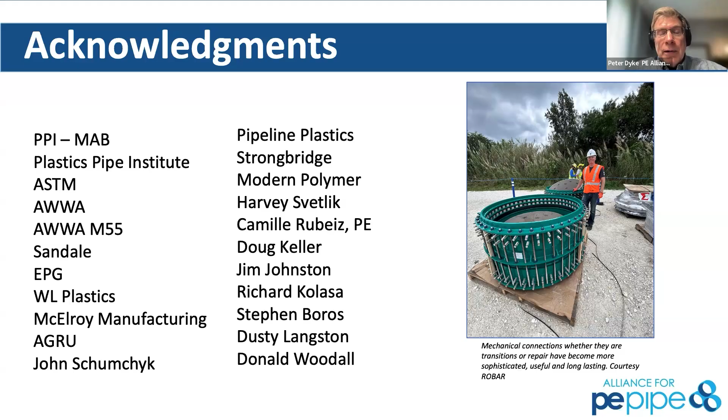Good afternoon, everybody, or morning, wherever you are. My name is Richard Kolasa. I'm with WL Plastics. I'm the technical service manager there and do a lot of the engineering work between sales and engineering to make sure that municipalities or whoever the engineering firms understand the product properly and hopefully take down any barriers for understanding. So I'm really happy to be here today and look forward to the presentation.

Well, that's a great photograph of you, Richard. It looks a lot better on the photographs than you do in person. So I'm thankful for that.

Stephen Boros, welcome to the Alliance's webinar program this week. Hey, good afternoon, Peter. Thanks. No, glad to be here for another PE Alliance. Fantastic educational webinar. Always happy to participate in these things. And I learn a lot as we go through this as well. So looking forward to it this afternoon.

You know, Stephen, if you didn't get a chance, we did a webinar a couple weeks ago on data centers. And we got to learn a lot about PPRCT and polyethylene. We got a bunch of projects that people wanted help with as a result, and I'm thankful for that. I'm so excited about those data center opportunities. Oh yeah, that's a really hot area right now. Can't get enough piping to go into those projects. So keep making the pipe, Stephen and Richard. Well guys, we're going to bring you back in a minute. You're our primary experts today.

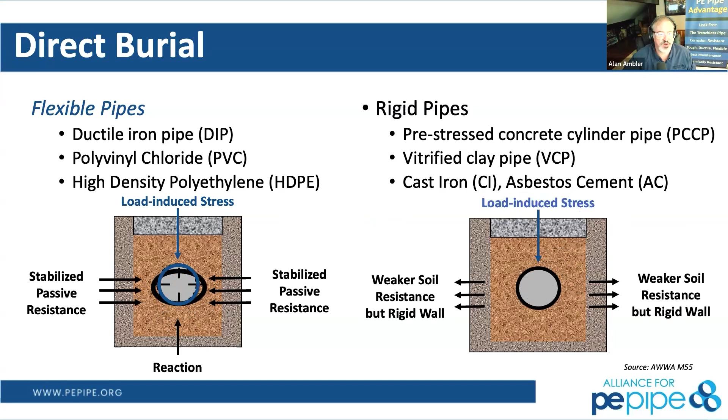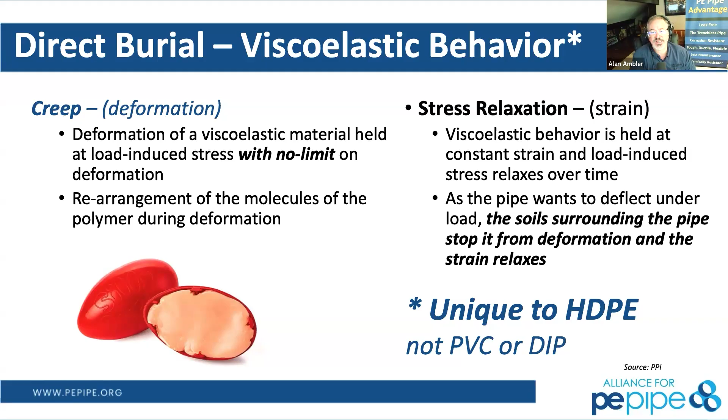What's unique to HDPE happens to be creep. If you go through the animation, we'll look at stress relaxation. Creep is essentially stressing that pipe or moving that pipe as we go through it. It's very flexible in our HDPE and allows us great working characteristics from a contractor standpoint. Then we have stress relaxation - once we stop putting pressure on that pipe to put it into a new shape or arrangement, the pipe will relax and become a happy pipe. That's stress relaxation, which is unique to HDPE.

This graphic here - yes, Richard. I just want to make clear on that last slide, everything looks like it's underground where that movement occurs. When we talk about this movement or this viscoelastic behavior, it's really unrestrained - it's like the pipe is just floating in air. So when we look at our calculations, we don't look at it as compacted in the soils. We want to have that understanding that this will occur when there are no resistant forces holding that pipe in place.

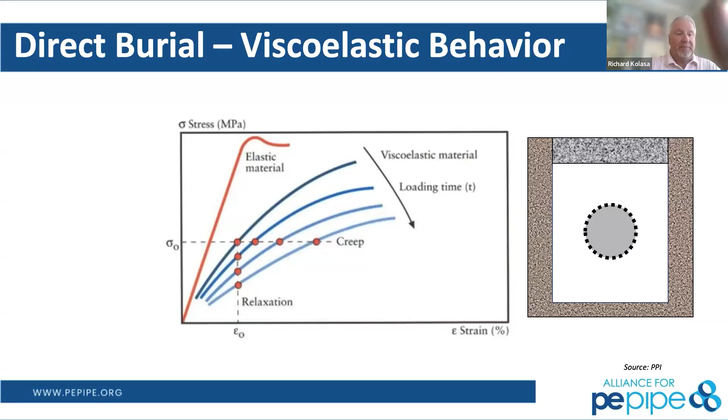Absolutely. So that's during the actual construction period when we're installing the pipe, and then we put the soil that surrounds that pipe to have a soil stiffness factor through it as well. If we don't have the soil surrounding this pipe, just like what we see here, then we're going to have that creep occur over a time period. We put some stress on this pipe during actual installation, a loading condition, and without that soil surrounding it, we'll have that creep occur.

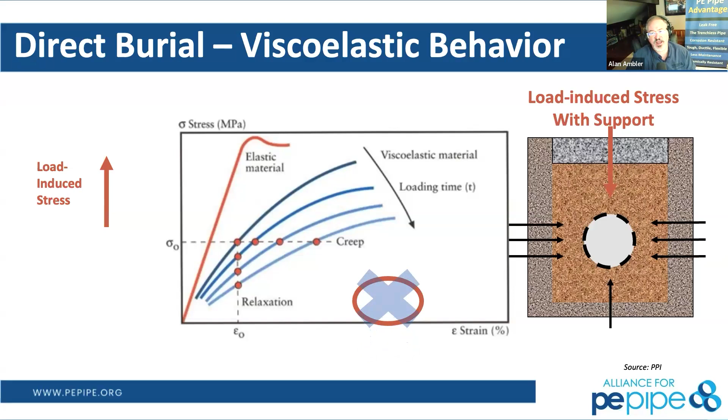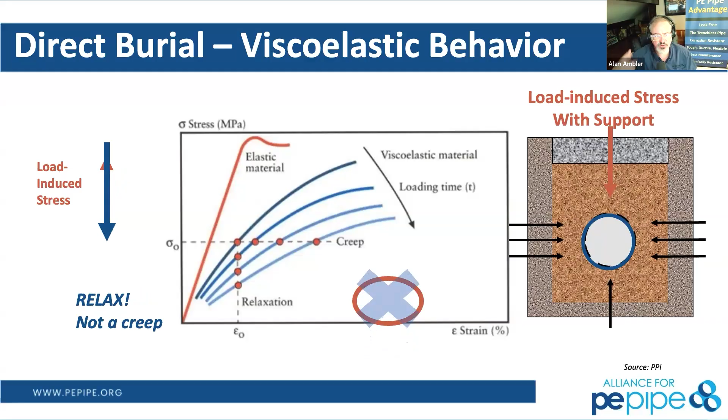You'll see as we come through this, by the time we put the soil surrounding this pipe itself, that pipe stiffness factor interacts with the soil stiffness factor, and then we get support and distribution of that load through this soil column. We won't have the creep associated with pipe that did not have the soil with it. You'll see through this, as we have that relaxation period and we have that soil surrounding it, you won't have that deformation.

Here's the technology or terminology of the pipe embedment materials. We have embedment, trench wall, bedding, foundation, and backfill. All of these things work together to distribute the load vertically from either a live load or a soil load as we go through it. Then we will look at how that trench reacts with the pipe to distribute those loads.

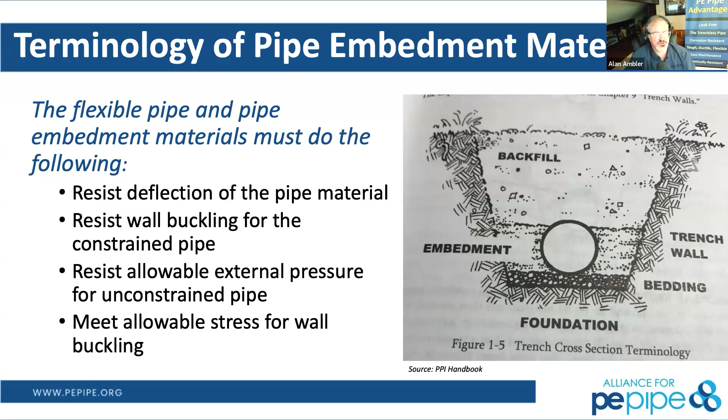Then we will embed the material and also backfill on top of that. One of the cool things about HDPE is the fact that we don't necessarily need to put people in the trench in this scenario, and it can be a very productive install.

In that situation, you'd have that person get into the trench and make that final connection as we go through it. We can't have an entirely HDPE system for municipal water and wastewater in some instances because we don't make valves or other things fully out of HDPE in larger diameters. So there will have to be some type of connection, and in that scenario you'll have a person in the trench or excavation to perform that final connection.

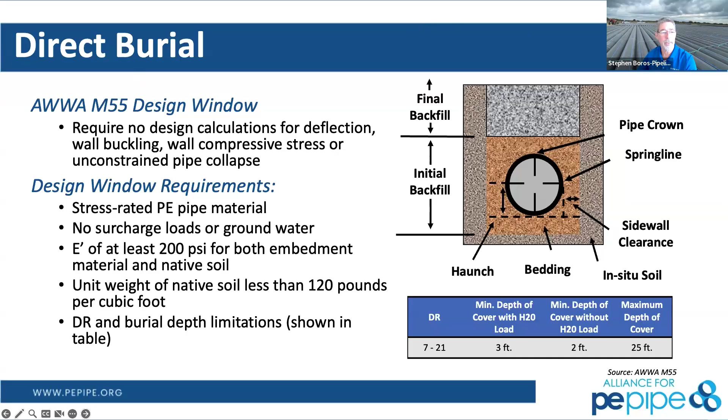We didn't put this in the deck, but a remedial class for the younger folks on class 1 to class 5 soil classifications and how that impacts the pipeline, please. Yeah, we have a slide on that later on we can point out as it comes up. But thanks, Alan, appreciate you letting me jump in. Oh, no problem, keep going if you would like to.

Just to address Peter's topic there, class 5 soil happens to be organics, peats, moss—any type of thing we do not want around any pipe, no matter what the pipe design is. And then we get up to class 1, which happens to be the stiffest backfill that we could put around there and maintain. So we're looking at how that pipe stiffness interacts with the soil modulus.

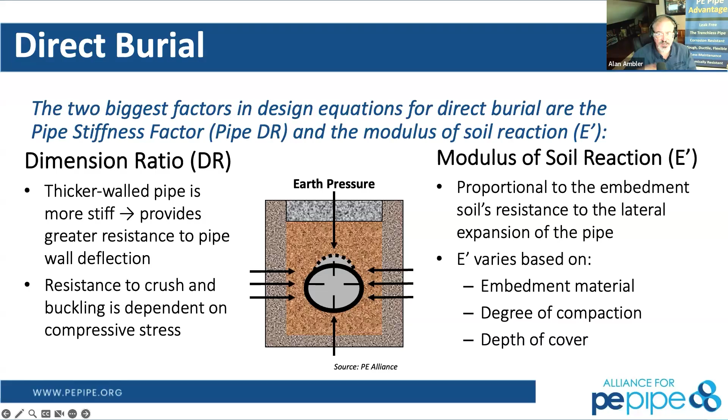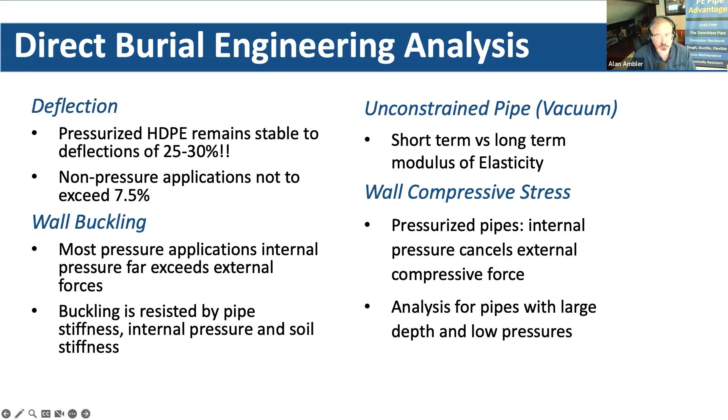Both of those things work together to distribute the loads, and we can easily take a look at this as we go through it. The equations we're going to look at here are deflection, wall buckling for unconstrained pipe (in a vacuum scenario), and also wall compressive stress. All of these come from the AWWA M55 manual, and we have a spreadsheet to help you estimate and calculate these deflections as we go through all of these equations.

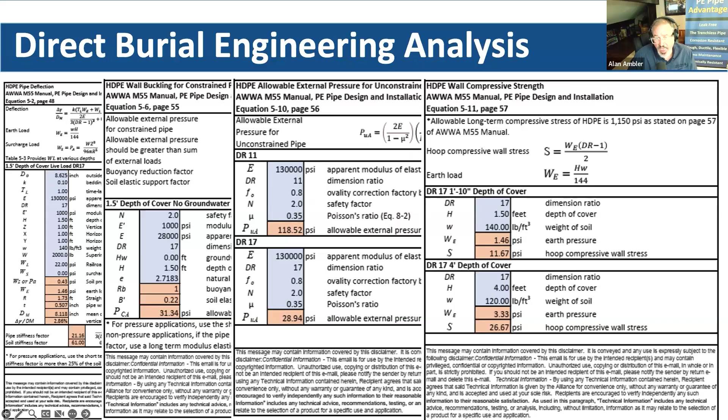So that pipe stiffness factor, when we get into a heavier, thicker wall pipe, that DR7.3 is 1600 psi. That's just the pipe itself. And then when we look at a DR32.5, that's 12.5 psi. So that's an engineered backfill that we're going to put back with the DR32.5, in which case the soil that surrounds that DR32.5 is going to take over a lot more of the loading condition than what we'd see for a...

DR7.3. So both of those things work together in order to be able to distribute the loads, which you'll see in this equation as we go through it as well. So it is significantly higher - obviously it's 1600 psi, then 12.5 psi as we go through.

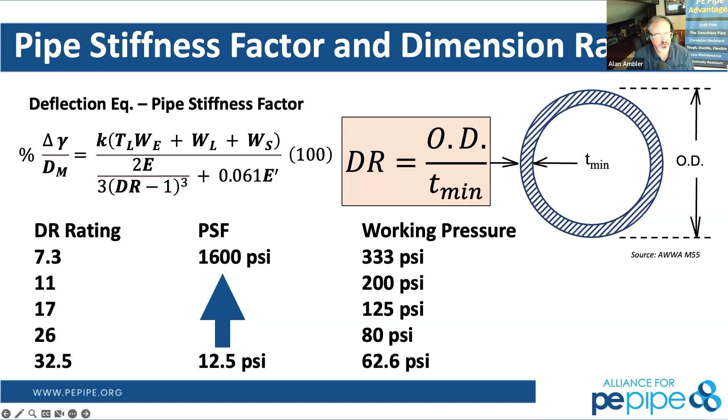So before we move on from this - an anonymous attendee just asked this question: is what you're saying that HDPE is more forgiving than other materials when it comes to human error by contractors in meeting compaction requirements, or are you saying something different?

I'm not necessarily saying that it's more forgiving. The actual working with the contractor and using the pipe is a forgiving process because it's so much more flexible than other pipe materials. What I'm directly saying is all of that pipe stiffness factor plus the soil stiffness factor works together to be able to distribute the load, and it's not as big of a deal as one could otherwise make from a plastic material.

One of the things that people like to say, particularly ductile iron - I mean, they're so proud of how strong they are, Alan or Stephen. What does that mean? And is that benefit really a benefit if people compact the soil properly?

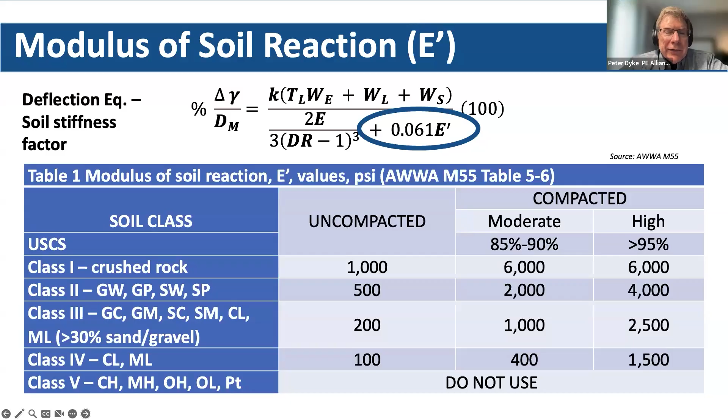So what we'll also look at happens to be a live load. We talked a little bit about stress relaxation, we talked about external conditions. One of the things I'd like to really point out here is for pressurized pipe, the internal pressure trying to get out can often be exponentially bigger than what is exterior loading on the pipe. So I'll point to 8 foot of depth with a live load of the box truck - this is a Penske fully loaded with the Alliance for PE Pipe gear as we come to a roadshow for you.

The external loading conditions at 8 foot depth is going to be less than 1 psi. So a DR11 that happens to be rated for 200 psi, that's going to be exponentially higher than what we'd see its external loading condition in an 8 foot depth. That's exactly why we talk about these, and we show you what these actual calculators will do.

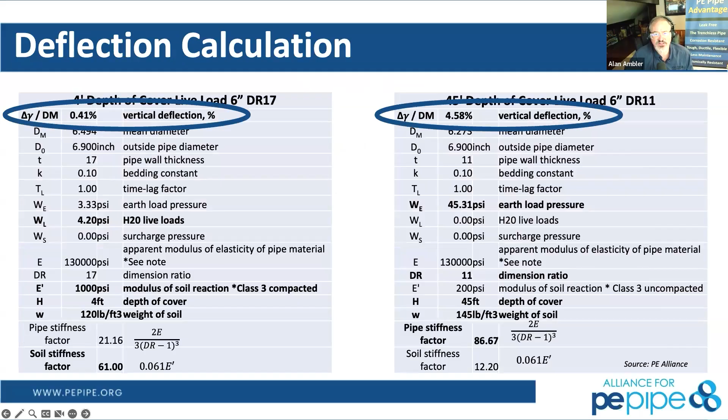This is a 4-foot depth of cover, 6-inch DR17, and then also a 45-foot depth of cover for a 6-inch DR11. We're going to show you exponentially the earth load pressure on the 45-foot depth of cover is going to be our highest one at 45 psi, but a DR11, of course, is a 200 psi rated pipe. A DR17 at 4-foot depth of cover, the highest load there is going to be that 4.2 psi of the box truck running over top of it in a flexible asphalt, so it's still not substantial with regard to a live loading condition. Our calculators are here to be able to show you that.

The other important aspect here too is the modulus value for the polyethylene, because we're talking about data centers and all that stuff, some of these cooling systems are running at higher temperatures, so you need to take that into consideration, especially if you have the H20 loadings. As you know, polyethylene, as you go up in temperature, will have a softening effect at higher temperatures, but is workable up to 140 degrees Fahrenheit. So just always consider that temperature and that modulus of the material as well.

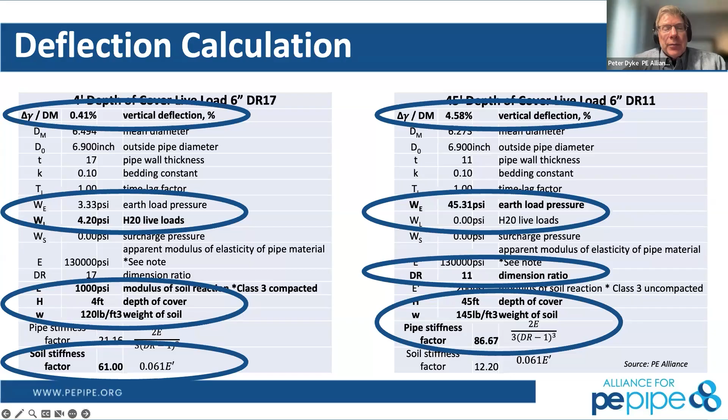Okay, thank you very much, Richard. One of the things I'd like to add, Alan, for the benefit of some of the newer people, I looked at the list today. We had several hundred people on this call, Alan, and not everybody understands the difference between, if we say it's a 200 psi pipe, that it's a 200 plus a 200 surge psi pipe, whereas other materials, they go down, they derate once you add flow. Could you just give us a quick 30 seconds on that, Alan, as a refresher, please?

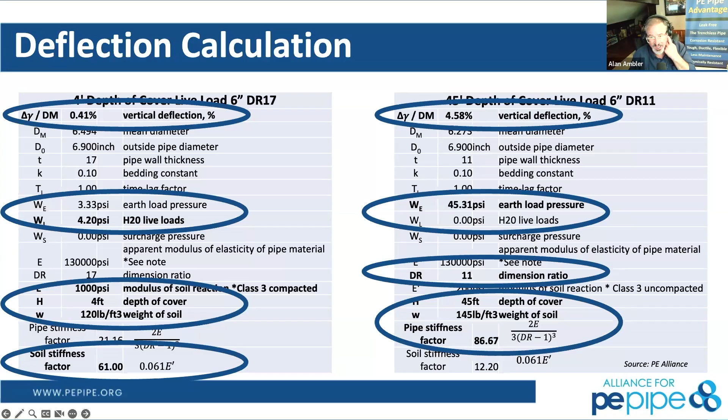Sure. So HDPE itself allows us for 1.5 times that pressure class to be able to be what's called recurring surge, so that's 55 cycles a day. And occasional surge is 2 times the actual pressure class for 5 or 6 cycles per day for that occasional surge. So while we have a 200 psi pipe at DR11, we can actually resist surge pressures up to 400 psi with that pipe. Those pipes, PVC, ductile, are differently designed with regard to AWWA and how we look at pressure class itself, so you'll have to look for the guidance that AWWA would give you for that information.

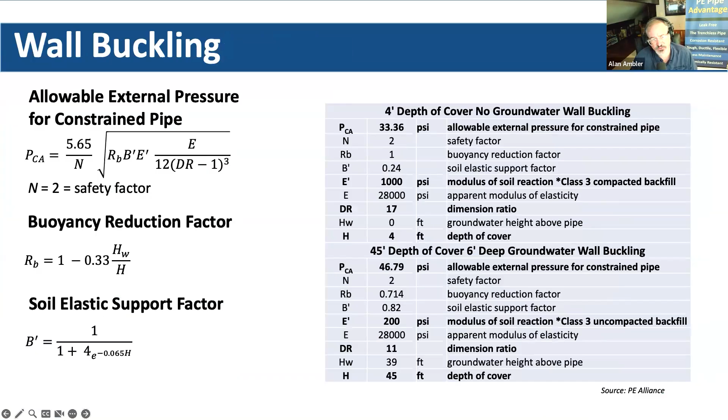So here's wall buckling. This is just another part of the calculator as we go through, and we take that specific scenario that we looked at to be able to calculate those. So a vacuum pressure, what we're looking at happens to be if we have full collapse within the pipe, and we'll see a DR11 can withstand 118 psi versus a DR17 at 29 psi. So with a thinner wall pipe, we will need to look at vacuum pressure if we expect to have some type of a break within that pipe. Vacuum pressures happen to be when the pump turns off, or if there's a break in a force main on a major hill or something like that. We'll be looking at that.

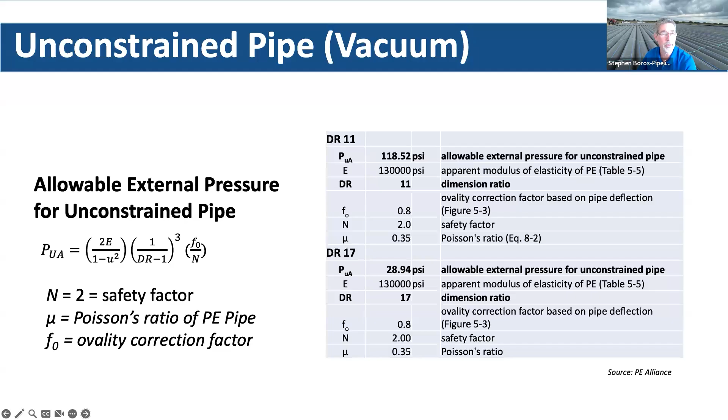Yeah, Peter or Stephen? Yeah Alan, just on that vacuum, that's a really good point. Especially looking at force main design and things like that, which could go under vacuum if your vacuum relief valves fail or something like that. Even with a DR17, your allowable external pressure on that could be as much as almost full vacuum and not collapse, so of course it depends on your soil envelope and things like that. So it's not like you're going to have to worry about this type of full vacuum effect if your vacuum relief valves do fail in a force main. It's not going to damage the polyethylene unless you have much thinner walls, DR21, DR26, things like that, which are normally for gravity. Absolutely, Stephen.

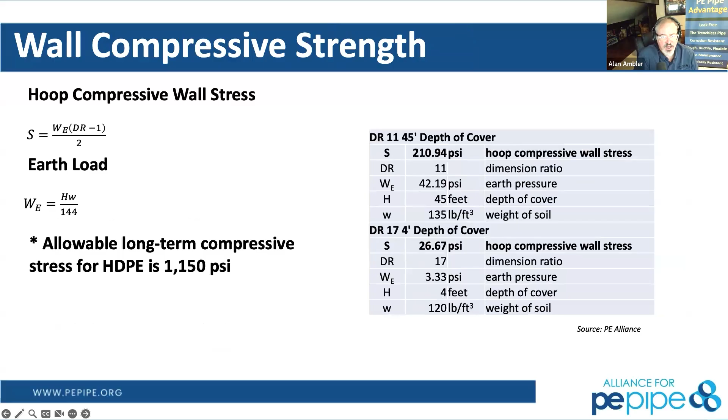Thank you very much. So we'll look at wall compressive strength as well through the different depths of cover as we go through, and then calculate this as we continue to go through in our calculators. Keep going. And then now here with thermal expansion or contraction calculations as we look through.

So one of the things I'd like to point out again before closing and moving on from open cut is 98% of your installs are going to be within that design window, and you do not really need to calculate a whole lot unless you have an extenuating circumstance.

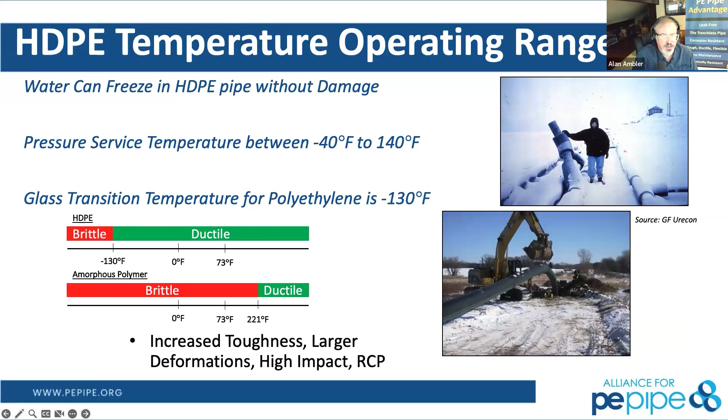So Richard, you want to come on and guide us through HDPE temperature operating range as we're looking at this? Yes, I would. Thank you.

Because we have this viscoelastic behavior of polyethylene, we are very ductile to very, very low temperatures. Not that you would ever operate in a glass transition area of minus 130, which is really unrealistic, but it's important to understand that you are ductile with high density polyethylene at zero and below zero type values. And that's really, really important.

However, it does become contracted. So the amorphous areas do become tightened within the polymer itself. So this way, you still have that ductility, which is really, really important. But if you're trying to bend pipe around corners without fittings or transitions, and you're in that allowable zone of the allowable bend radius, you have that ability. But the forces required might be a little bit greater because it is a little bit more dense.

Whereas amorphous materials, such as PVC, they're brittle right at 221 degrees. So they're a brittle product. So having any bending or movements or moments on those pipes can add really intensified stresses on those products. So you do have that luxury, but know that it does change as your temperatures go down and up. So it becomes more flexible when you go higher and less flexible when you come down.

And this is exactly what we have to understand, again, for the newer people on board today. Everything in polyethylene is evaluated at 73 degrees or ambient temperature. So that's our standard, that's our normal area. But in pressure operation, as you go up in temperature, you're going to lose some of that capability. You don't negatively impact the performance of the pipe, it's just the polymer becomes softer. So that aspect you have to understand.

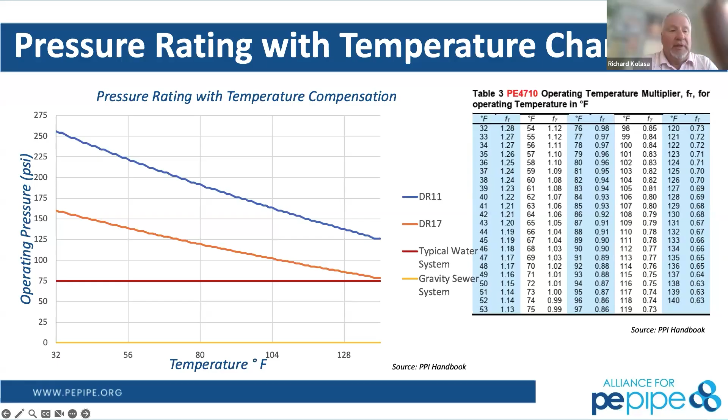Oh, absolutely. And that's really vital because also not only is it the location of the polyethylene versus the other pipe types too, because PERTs and PPRTs are typically used inside. So you can transition from a polymer to a polymer. So it can absolutely reduce your stresses in those type of situations if you had those thermodynamic differences, right? Again, thermal expansion and contraction, one of the biggest areas that we're working on.

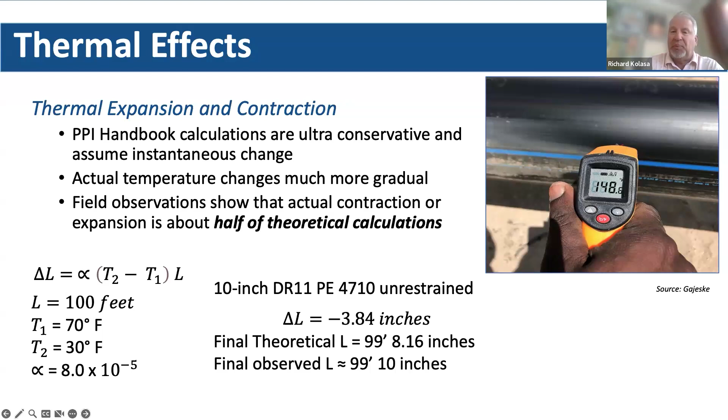You're looking at, in that 100 feet of 10-inch DR11, 3.84 inches of expansion or contraction, depending on which direction you went. As you went cold, it'll be negative. As you went hot, it'll be positive. So, but that's not really a real concern. We just need to understand it because there's some stresses if you had a system that is above ground and you had some stresses that are applied with that expansion or contraction.

So I like to say, and Alan has counseled me on this for years, Richard, that the thermal effects we see are rare underground because of the soil friction that is observed. But right now in Washington, D.C., they've got a bunch of polyethylene trying to help solve that 300 million gallon wastewater dump of raw sewage into the Potomac River. They're not really worried about the thermal effects because it's a short run of polyethylene—they've got seven 100-foot runs.

What do you see in the field? Does the thermal effect really affect the operation of these pipelines? We're saying no. From experience and what we see in the ground, if your total system is polyethylene—where all the joints and fusions are self-restrained—we don't see that movement at all.

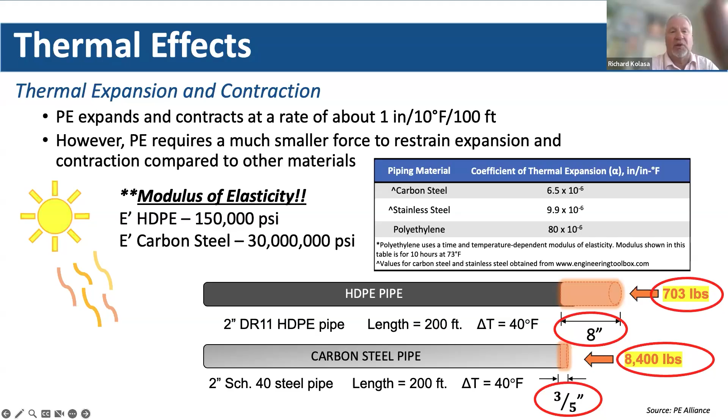So Richard, this is new for us. Whenever I look at an above-ground project and start to go through the design analysis, I look at temperature fluctuation through weather.com or some other app like that. I'm looking to see what an above-ground pipe may actually experience. Our literature, which gives us the information and equations to perform the calculation, tells us that typically only half of those theoretical calculations is what is actually observed as far as temperature fluctuation is concerned.

So there's things like friction force that Richard talked about through soil—either a full circumference if it's buried, or if it's not buried, then we're seeing soil friction as it moves across that soil interface above ground as well. We look at those temperature fluctuations for actual field conditions to try to predict what kind of changes in thermal expansion or contraction we might see.

Next slide. Just one more comment on that—it's really important to understand this is not an instantaneous response. If you look at those graphs over time, it's going to take a long time for the pipe to change temperature, so it doesn't happen instantaneously. If you had a swing of 70 to 30 or whatever that number was, it's not going to happen instantaneously. And don't forget, as we talked about earlier, we have that viscoelastic behavior that releases stress to avoid any further strain on the pipe.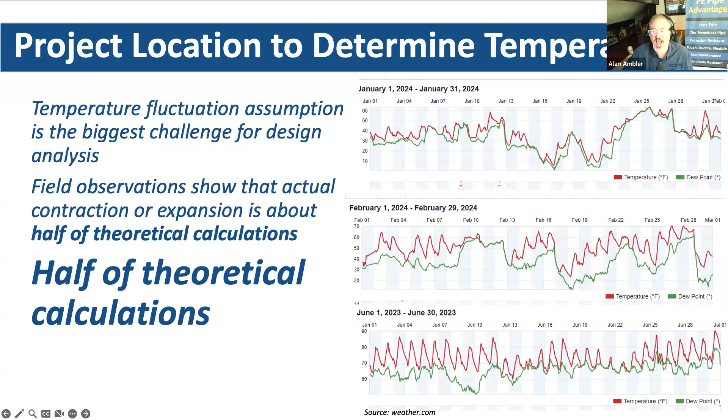Absolutely, Richard. So those equations assume an immediate temperature change—they consider it to be instantaneous. That's why the actual movement we see is less than that. I'll also look at the project specifics to see if there's some type of sun exposure associated with an above-ground installation. What you'll see here is a small amount of UV effect.

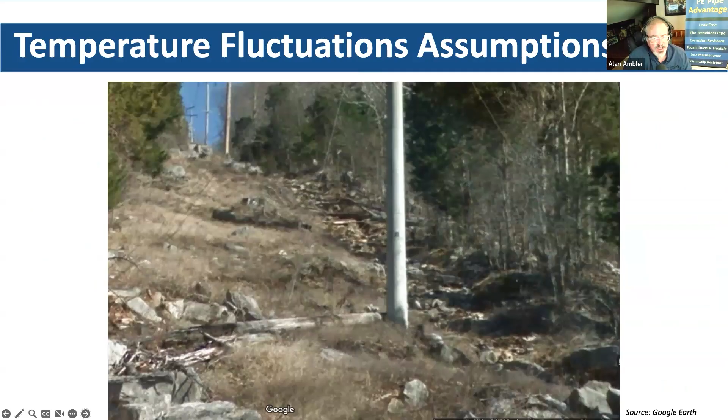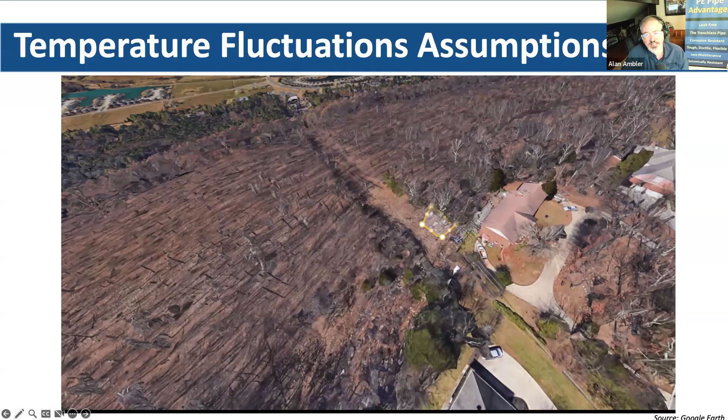This above ground pipe was for a temporary bypass, so I'll make assumptions about that particular project and the behavior of the pipe based on UV exposure as well. As responsible design engineers, these are things we take a look at when making temperature assumptions. That's probably one of the most challenging items for a design engineer: figuring out what our field conditions will be with regard to temperature change.

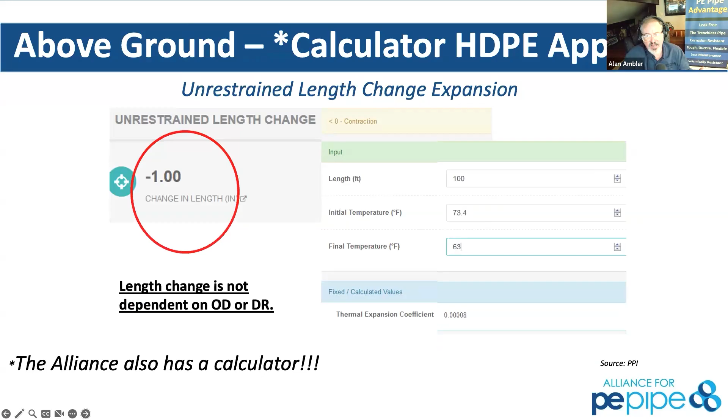We'll look at a calculator for HDPE applications. That's also a PPI calculator that allows you to go through and take a look at your specific application, plugging in everything you need right there online. It will look at all of those conditions. In the Alliance's spreadsheets, we show you all the calculations as well as where they actually come from.

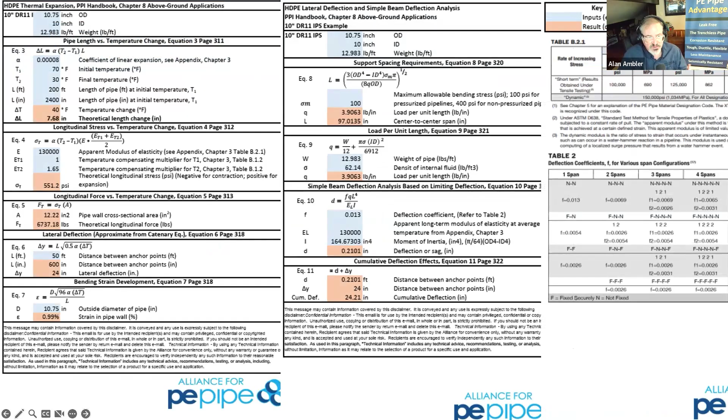So here's our calculators for the Alliance. We'll take a look at DR rating, support spacing requirements, and show you where we pull this information from. We'll translate from expansion or contraction directly into a stress based on the DR and the size of the pipe. For above ground, we're looking at unrestrained length change, maximum pull forces and anchor forces, suspended pipe support spans, and all those things as well.

I'm very happy that Richard pointed out that the soil column surrounding the pipe for buried applications often absorbs quite a bit of that change as well. Yes, Peter?

In effect, under below ground, it says thrust block sizing—should that be anchor block sizing? Thank you very much, yes, it should be anchor block sizing, as thrust blocks are specific to changes in direction. Anchor blocks are for a terminal connection with a different type of pipe material or changes within the actual system itself. Thank you very much for that, Peter.

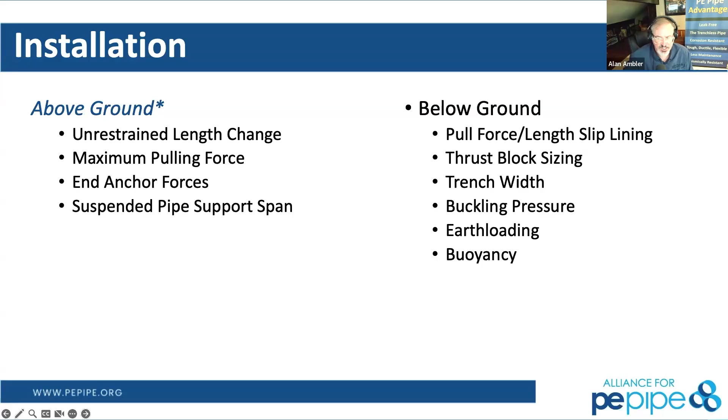Appreciate it. Not to be that guy, but you've preached that to me over the years: one of the key distinguishing factors of polyethylene versus legacy materials is that we are fully self-restrained, so the need for a thrust block doesn't exist. However, the need for an anchor block does exist, am I correct? That is correct. When we're changing material types or connecting to other systems, we will always look at our design requirements for anchor blocking.

Yes, Richard? That's just been recently changed because the MAB, the Municipal Advisory Board of the Plastics Pipe Institute, redid all the calculations for those anchor and thrust blocks. They want to call them anchor blocks now because they factor in friction resistances and everything to reduce their size. So they're not as big as they used to be, but there was a change that just recently happened.

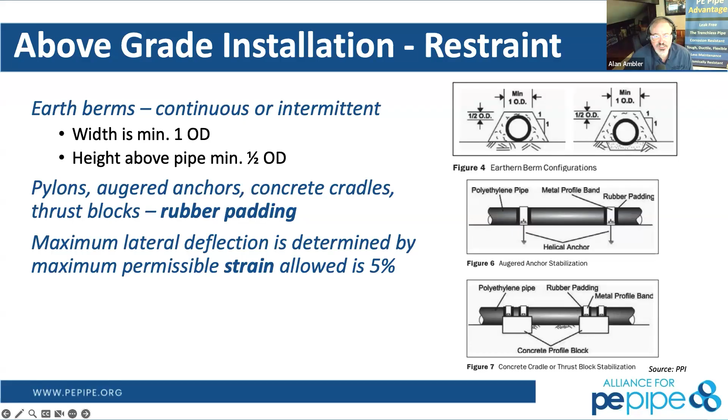Awesome. So in above ground scenarios, sometimes it's just easy—you can dump some earth right on top of that pipe to hold it in place. We can use helical anchors, concrete profile blocks, any type of connection. We need to make sure there's rubber padding between a metallic portion and the HDPE to protect the HDPE as we go through. But above ground uses can be pretty straightforward as far as how we restrain that pipe.

So we'll look through. Yes, Richard? It's also important to understand that when you put those brackets in there and they're tightened down, holding that pipe in place, that's a restraint. So now you divide your distance from those points within those anchor locations. Absolutely.

So I'm going to use a term that Peter said earlier, which is forgiving. If we look at a 40-degree temperature change through the deflection and strain, while we may very well move quite a bit because of that massive temperature change through HDPE, our strain within the pipeline itself is not going to be as high as other pipe material. This is specifically due to the fact that the force required to stop the movement of the pipe isn't as high as other types of materials. That has to do with the modulus of elasticity specific to HDPE.

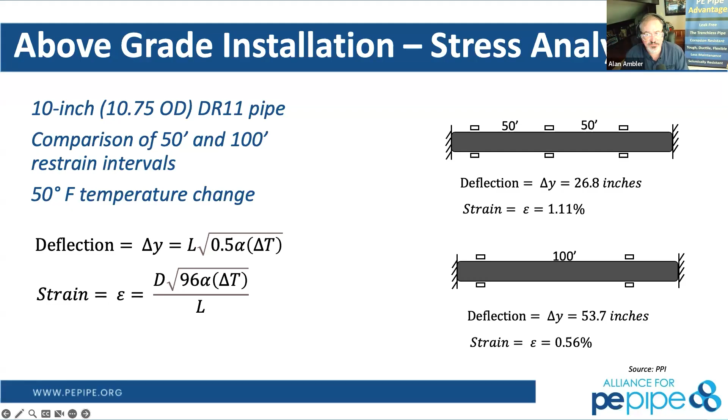As you can see here, with a 100-foot restraint, even though we may very well move 54 inches in between those restraints, the strain developed at the restraint itself is less than 0.56%.

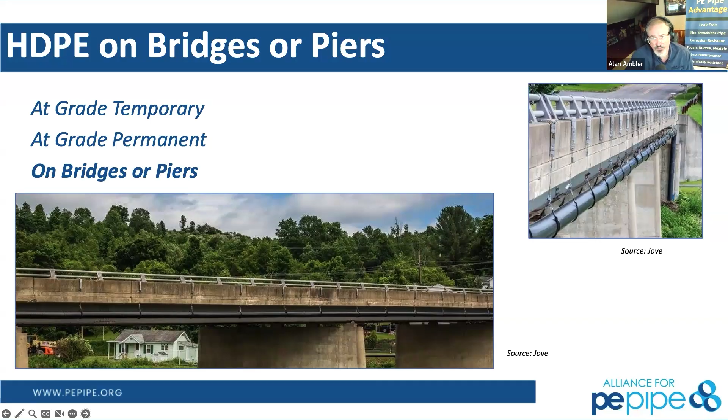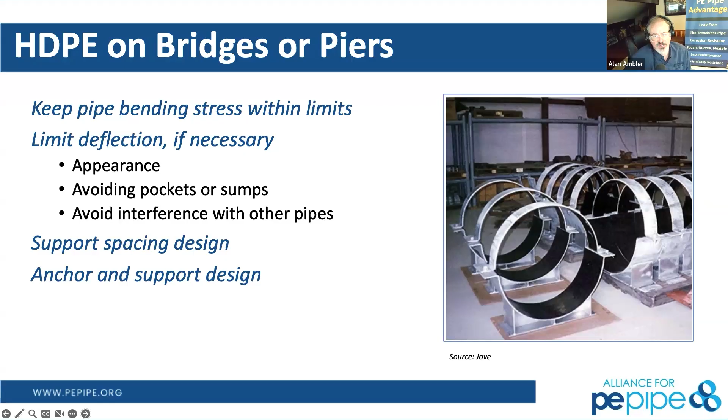So as we look through the design of these systems on bridge structures or otherwise pressurized pipelines, we would look for the stress at each of the connections. For non-pressurized pipelines, we're going to make sure that pipe doesn't sump or have a low spot as we're moving along. That's going to be our design guidance. Also here you'll see that rubber connection while we're holding that pipe into place wherever we're putting it. We want to make sure the connection is robust and is not detrimental to the HDPE through a direct connection.

So here's some support spacing design, the steps that we're looking for. I talked about a sump. We're talking about deflection as well, which we'll look at in between each of the connections as we go through. The beam deflection analysis is the equation we run through to take a look at how this deflection actually occurs. So we'll take a look at the max allowable bending stress through this process.

Yes, Richard? Just a quick note on that last picture you had—if you notice, they had rollers, not clamps, so this pipe was actually allowed to move. They designed it to slide back and forth to alleviate any kind of stresses. That's an easy way to get through that. Absolutely, thank you very much for pointing that out.

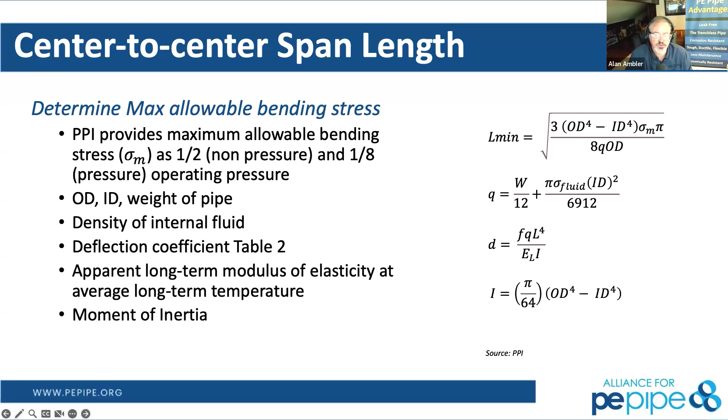So here's just the equation that we have. We do translate this into the calculator for you as well. While we are looking at span-to-span length and the stresses determined within it, we are also looking at the fluid density and weight as it's conveyed through this pipe. So we have the pipe, plus the weight of the fluid within the pipe, and then we translate that directly to the deflection calculation as we're seeing here.

So a 10-inch pipe, when we're looking at 100 psi bending stress with 13.45 feet in between spacings, we're looking at 0.00002896 inches of deflection. So we are not deflecting a whole lot within this pipe, and it's simply not moving for us in that process.

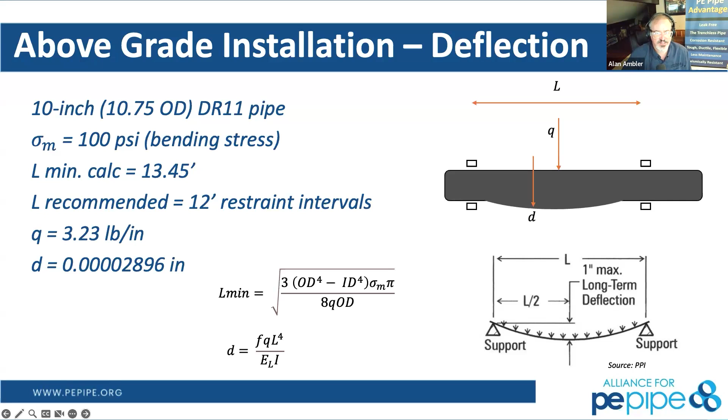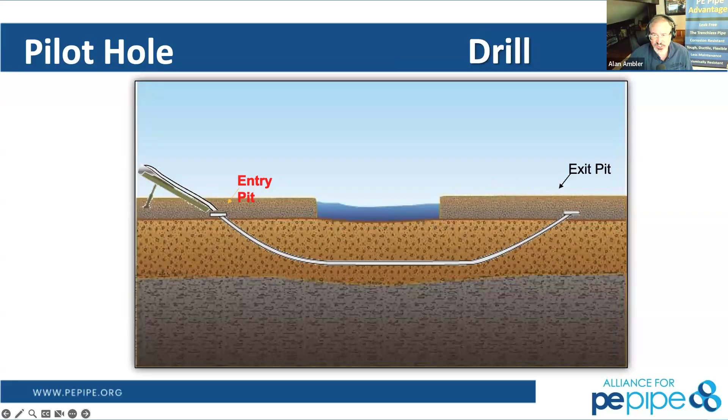So now we're going to get to horizontal directional drill. Here we'll talk about the design metrics that we're going to be looking for with HDD as well. These are our general items for complex or challenging HDD installs. We recommend that you go to a professional engineer who is very familiar with HDD as well.

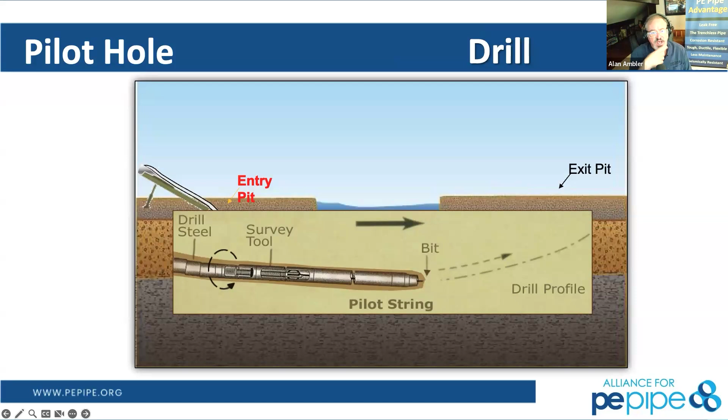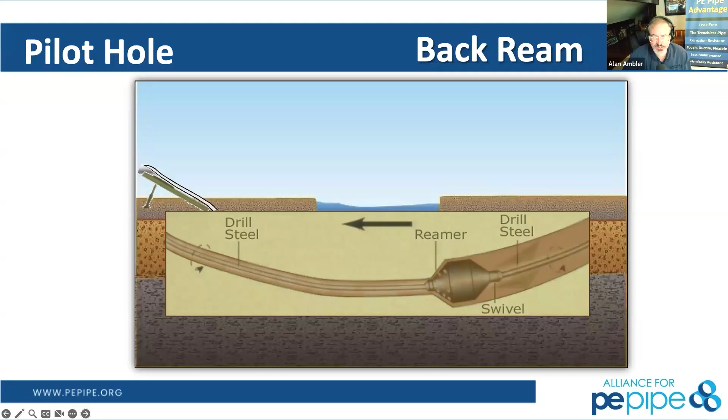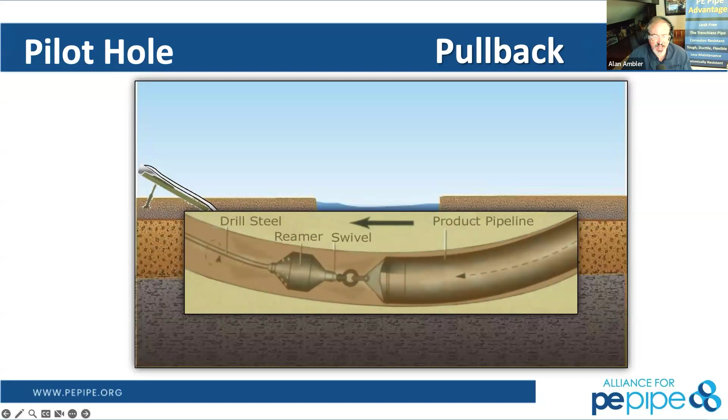So we're looking at basically an intelligent tool coming through, and we can track exactly where that tool is, as you're seeing here. As we go through clearing some type of obstruction, either a river or a road or something of that nature, we track exactly where that intelligent tool is. Once we have the original bore path come through and it's in proper alignment, we can expand that hole through reamers and other things, moving material as we enlarge that bore path, and then we'll start to pull the product pipeline back into place as we're moving this into final HDD.

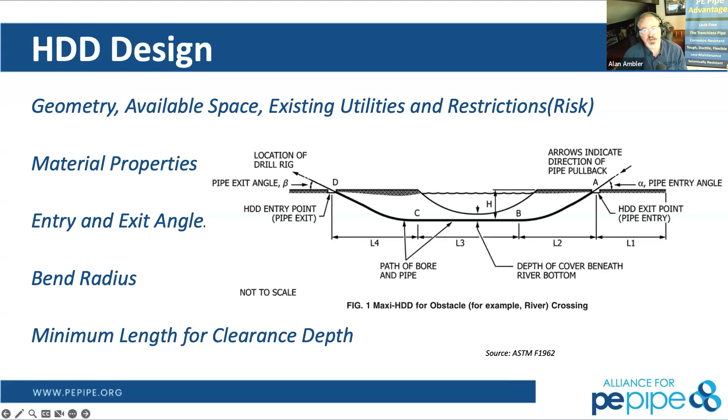We look at the entrance and exit angles, bend radius, and minimum length for clearance depth. With regard to HDPE, the allowable bending radius of the material is more forgiving than what we'd see in a drill string itself. So the entrance and exit angles are going to be a primary limiter from the equipment installing the pipe, and also the drill string as we go through that.

We look at rig capability, pipe size and material, and installation geometry. We want to make sure that whatever bore path we're designing as a respectful engineer is able to be constructed by the equipment that's out there, to be able to put that into the ground, and also show us the forces that are necessary or develop as we're installing this pipeline.

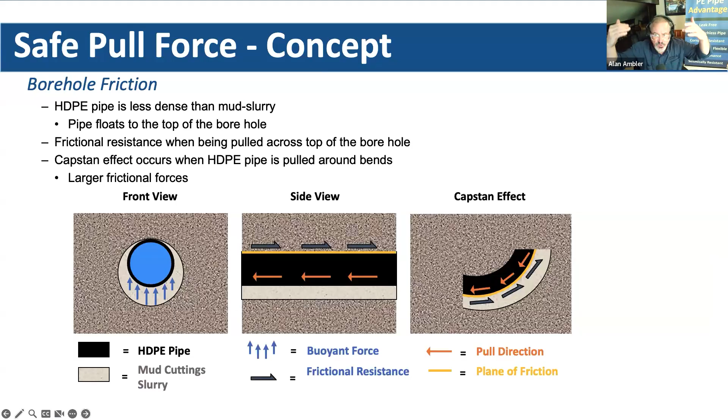What we're looking at from a safe pull force standpoint: HDPE is buoyant, so sometimes it'll undergo what's called the capstan effect, where it floats within this bore path and develops friction forces along those bends. As we achieve those bends, we can add ballast to this pipe as it's being pulled into place, which can be water or other dense fluid within the pipeline, in order to drop that pipe down and reduce that friction force. We'll take a look at those items as well while we design them.

The easiest parameter to get to is that allowable safe pull force. This is a table that the industry presented, and it shows us the DR rating and the allowable tensile yield strength of that pipe as assumptions we go through. Then you can apply different factors of safety or environmental factors as we look through here.

Yes, Peter, we just got a question that calls to mind something pretty interesting. It's tangential here, Alan—sorry to take us down this little rabbit hole. The question was, how big a drill have we done? What's the biggest drill? The biggest drill I know of is 54-inch.

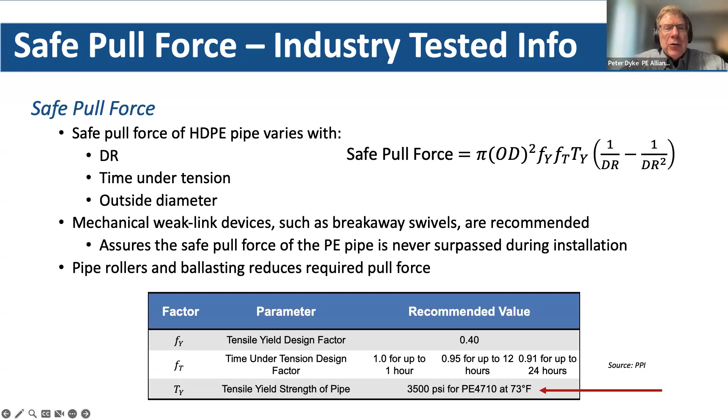We did a 54-inch DR-17 in Miami Beach eight years ago. That one has been celebrated in the industry—it was a huge job. Last year, in 2025, we did two huge drills. One of them was down in Fort Lauderdale, a 54-inch DR-11, and that was pushing the limits. Then Garney did one under the James River, Alan—a 48-inch DR-11, I believe, and it included some 54-inch DR-11 that was open cut once it crossed the river. That one has been celebrated too; it's been in a lot of the press. So those are the big ones that we're doing, as far as I know. Those are great projects, Peter, thank you very much for providing the information for us here. You engineers out there keep pushing the boundaries, and the contractors are more than happy to take some risk with you to make sure we have what we need to push that.

Stephen, you want to come on and talk to us about PPI BoreAid and a preliminary design calculator? Yeah, be happy to. Thanks, Alan.

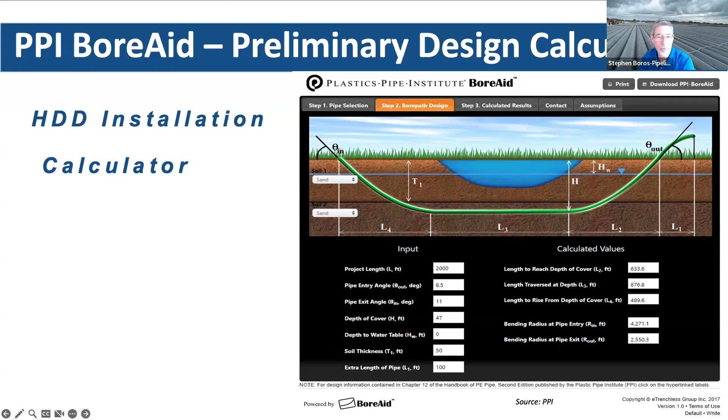This is an online calculator put out by the Plastics Pipe Institute, www.ppiboreaid.com. Remember to use PPI BoreAid, because Vermeer—I'm not sure if they still use it—did license the BoreAid name afterwards and have their own design calculator. But this is the PPI BoreAid version, free to use online. This will cover maybe 80-plus percent of all directional drill design that you're going to need to worry about. There are a few geotechnical things you can't get to, but mostly you can.

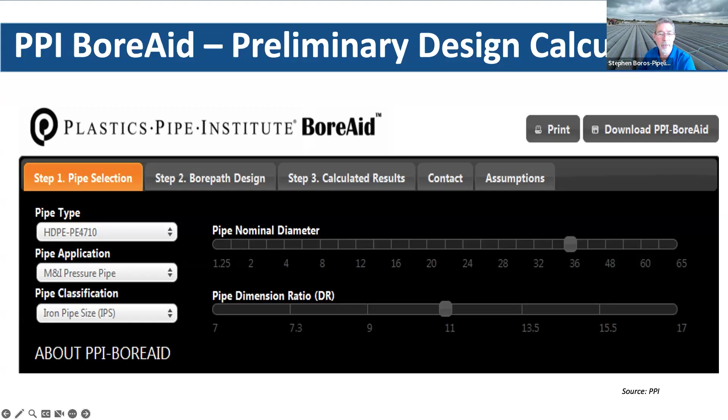So you start by putting in your pipe type, PE4710, then you pick your nominal diameter. It's a great tool to look at different scenarios as well. So say, all right, I'm going to use this diameter pipe and I think I need DR11. Let's pick 36-inch DR11, and then we'll go to step two, which is the bore path. It gives you some pre-selected numbers and shows your potential bore path. You look at your L1, L2, L3, and L4—all those add up together for your total directional drill bore path and how much pipe you're going to need to achieve that path. So you have to remember, it's not a straight run—you've got the down angle. It lets you pick angles that make sense as well.

For a pipe entry angle, it's not going to let you pick 45 degrees or something like that, which you can't do with a drill string. So you don't have to be an expert on this, and it'll just help you get through there. Once you put in all your soil depths, your water table ratings, and things like that, it'll give you your total length that you need.

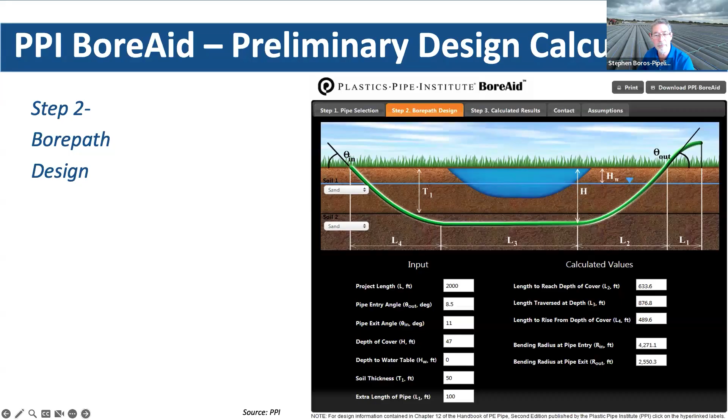Then you go to your calculation. There's two main things you need to look at that will be critical for a successful bore. First of all, it's going to be your allowable pullback force. You can see over here under installation, your pullback force and allowable pullback force. This is the calculated that you're likely to see, and here's what the pipes can maximally do.

The nice part about this is, remember in the example, we picked 36-inch DR11. So it gives you 3 different scenarios indicated by these orange blocks here on the left. Worst case scenario: no rollers, no ballast. You're just going to pull this long string of pipe into place, so you're going to have some significant pull forces on the pipe itself. It's going to tell you whether DR11 will work, or DR13.5, a thinner wall, or if you maybe need to go to a heavier wall, the DR9.

So it gives you all those scenarios to see what's going to work from a pullback force, but just as important, a collapse force. You got to remember, you got a lot of collapse forces working on that pipe - buoyant forces, capstan forces - that all have to be calculated, and PPI BoreAid does that for you.

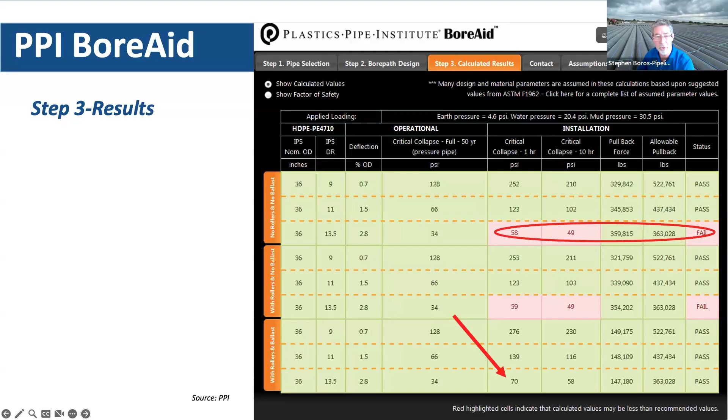Now, if you want to say, alright, I don't know if I want to use DR13.5, what if I go down here to the third scenario where I'm going to use rollers? I'm going to minimize that pullback force of that long pipe string. I'm going to put ballast in the pipe, fill it with water to give it more rigidity, more stiffness against buckling. Could I use a DR13.5 in that instance? And that'll show you that, yep, you absolutely can. So if that's critical for you, there are ways to get through that to get a passing, if you will, a successful bore design. It's a great tool to go back and forth and look at these.

So if you look at the schematic of what a pipe string is - I think Alan talked about this a little bit before - on the left-hand side is where your drill rig's going to be. You're going to do your initial bore path, it's going to come through with your tool. And remember, even today with polyethylene, you could do compound curves on this. Now, you can't do wild curves, but if you needed to curve around an obstruction or possibly a mild S-shaped curve, you can do that underground and then come back at your exit point at A, then come back with your back reamer and then pull the polyethylene pipe back in, taking into account this different bore path that you may have. So it's a great tool, and that's what, again, the flexibility of polyethylene really comes into play here.

So again, you go back into the design progression: determine your OD and DR, PPI BoreAid can help with that. Identify the minimum depth that you need in clearance under the obstructions to know how much depth am I going to have underneath the soil that I have to work with. You need good geotechnical drill samples to know what you're working with down there - if you have large cobbles, what types of soils you're dealing with. That's where a good geotechnical engineer comes into play on this and be well worth it.

Determine the suitable entrance and exit angles - they're going to be nothing extreme. Remember, those are normally going to be limited by the flexibility of the drill string itself, not by the polyethylene. The polyethylene is going to be much more flexible than that drill string will allow. So normally your maximum entrance and exit angles are going to be limited by your drill string. The radius that you can have once you get down to depth, and then you can come to a vertical or a horizontal, and then your exit curves.

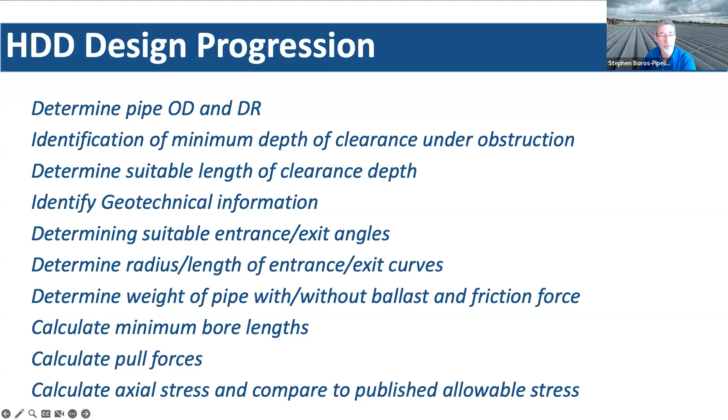And the drill has tried to force some pretty tough angles in there. And then you have to think whether it's even possible. If they do manage to do it, it could add extra stresses on the pipe. So the calculator will tell you if it's limited. So if you run into that situation, just try a longer length or a different depth to find out your possibilities.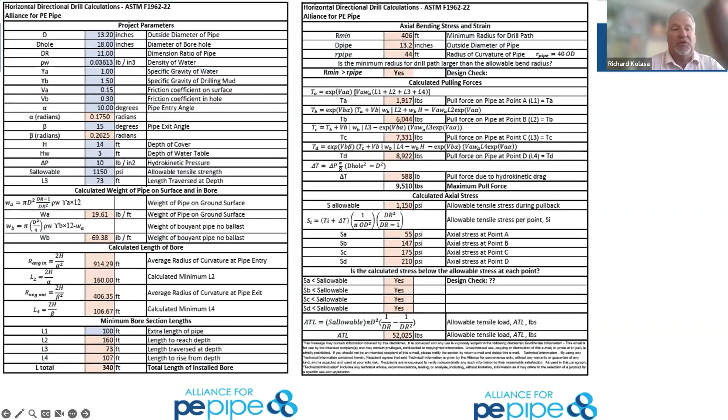That's a good point. So yeah, sometimes even having a longer length will make a more successful drill, or a deeper bore will have a more successful drill than trying to keep it shallow.

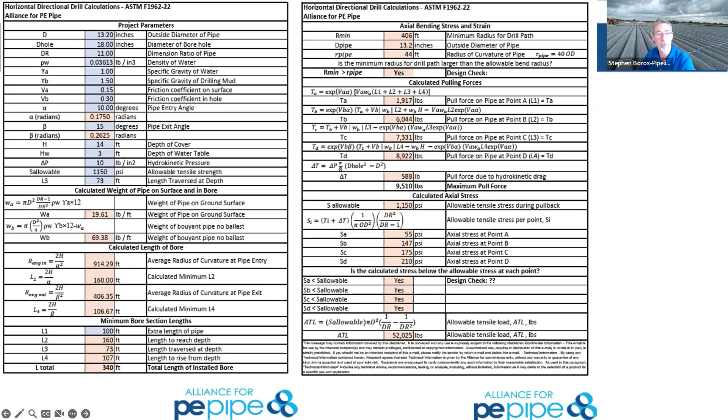Excellent point. Now you get into one of my favorite calculators that's online, PPI PACE, at www.ppipace.com. This is a calculation environment to look at a true apples-for-apples comparison between polyethylene, ductile iron, and PVC in most municipal applications.

It's going to look at your different pipe sizes and different pressure classes. This is a great tool for making sure you pick the right pressure class for each material. Remember, one of my biggest pet peeves: all pressure class definitions are different for every material. So if you use pressure class defined by ductile iron, it's not the same as defined by PVC, and not the same as defined by polyethylene. So you can't use pressure class for pressure class comparison and have a successful design.

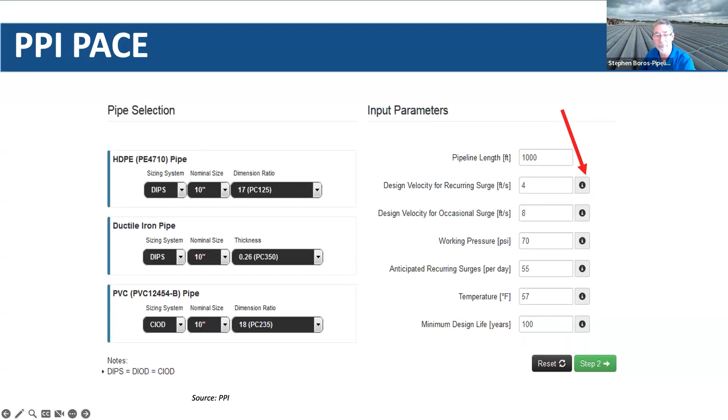PPI PACE will help you with that. On the right-hand side, you can put in your actual operating or design parameters: your length of pipe, recurring surge, occasional surge, your actual working pressure, how many anticipated surges you're going to have that day. Most force main design is a minimum of 55, sometimes more, your average underground temperature, as well as your design life.

You should never expect anything less than a 100-year design life today. If you click on the radial dots on each of those, it'll show you where that data comes from. Why do we pick 4 feet to 8 feet per second on flow velocities? Because that's how most systems are designed, and more importantly, how most systems are actually being operated based on surveys. So you might think it's only going to be operating at 4, but they could be as high as 8 at peak demand situations.

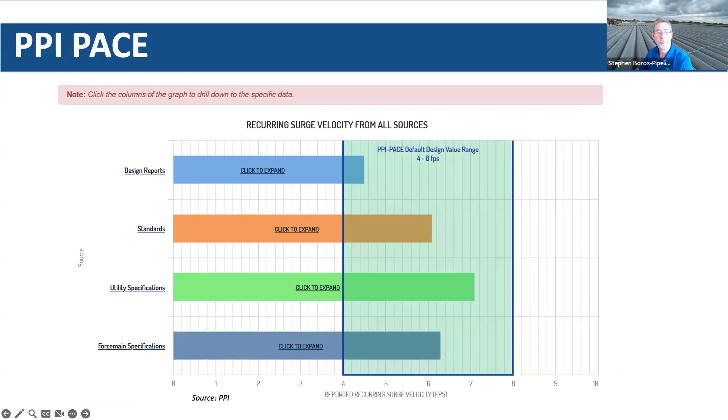On surges, like I said, if you look at the design manuals for polyethylene, PVC, ductile iron, specifications from a lot of major utilities, on a force main design it's 55 surges per day. That's a lot to take into account. And PPI PACE helps you do that, because ultimately that's going to be how these materials fail, by cyclic fatigue, if the material is susceptible to that.

So once you put in all your parameters, then you get the actual design. Here's how my design comes out, looking at all the different materials: polyethylene, ductile iron, PVC, and you look at the different pressure class. Remember, this is a pressure class 125 polyethylene, pressure class 350 ductile iron, and a pressure class 235 PVC. How do these all work? Do they all have successful designs in this rigorous force main application?

You can see here the maximum flow rate, very comparable for all materials. Head loss, very comparable for all materials. Surge pressures, that's where it's going to be different.

Polyethylene, you don't have to worry about surge pressures as much because it has a lower modulus. So that resulting energy change has to go somewhere. In a rigid material, it goes into the pipe wall and results in a high pressure spike. In polyethylene, because it's more flexible, it absorbs that energy, and the resultant pressure spike is much less, half or even a third as much.

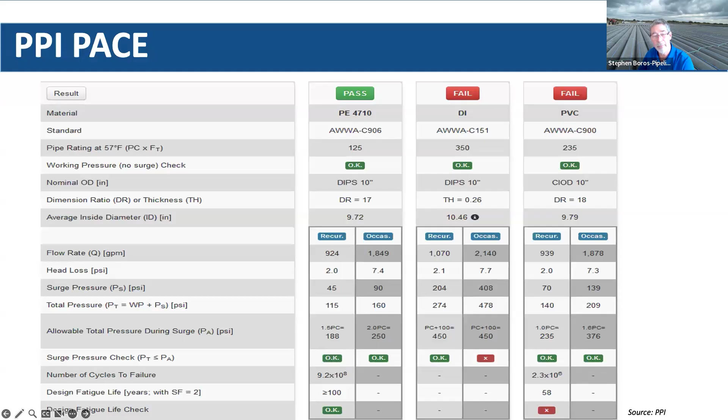Polyethylene can handle 15 million cycles at full range capacity, meaning full operating pressure class, and 1.5 to 2 times above that for 15 million cycles and not fail. Make sure your other materials can do the same thing, and if they can't, maybe you need a thicker or higher pressure class product.

This is the same information graphically, showing which ones pass and which ones fail. This isn't to show that ductile iron and PVC always fail—that's not what this is about. This is just under this type of situation. You pick different design parameters, and then everything will work. You just have to pick the right ones and understand what you're designing for.

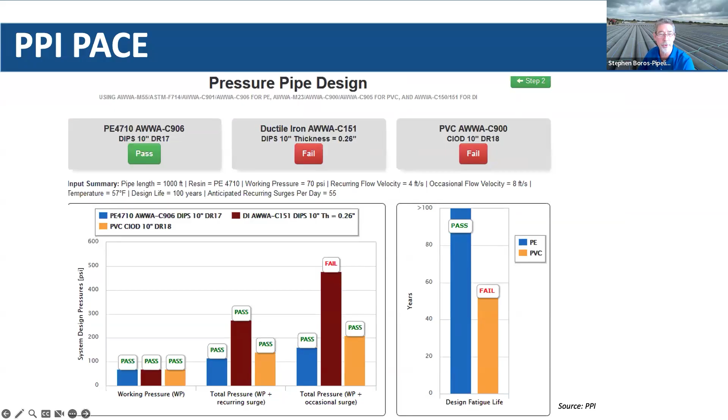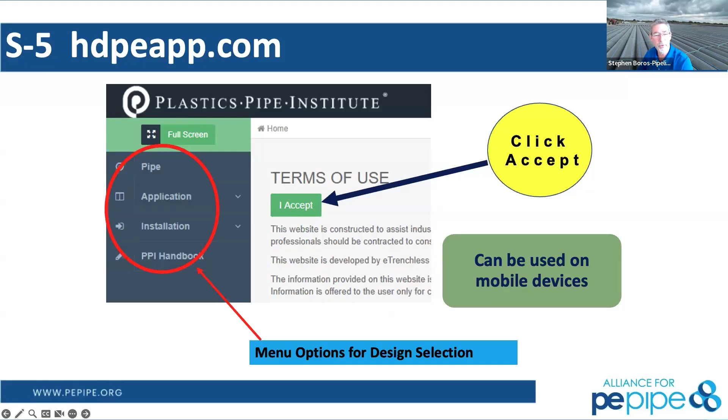Again, another tool I use frequently is HDPEapp.com. It's called S5 because that's what PPI called it when they developed the program initially, but online it's www.hdpeapp.com. This program will go through pretty much all the calculations within the PE pipe handbook, so you don't have to go through each one manually across a lot of different scenarios. You go along the top of the pipe, put in your sizing classification, IPS or DIPS, the nominal size of your pipe, and the DR pipe you want to look at.

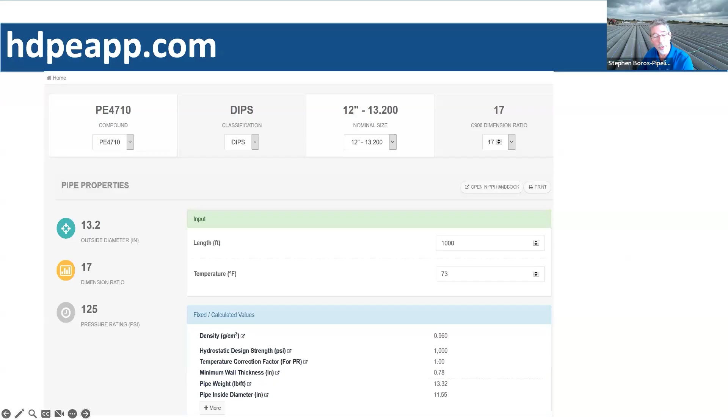Very initially, you just look at pipe properties—what are my pipe properties down here? If you click on the More button, it'll show you a whole list of pipe properties helpful for your overall design rating. It'll show you DR17 at 73 degrees has a pressure rating of 125 PSI. That means it can operate at 125 PSI with flow up to probably 12 or 15 feet per second without having to derate that.

If you go into some of the installation type conditions, let's say I'm dealing with a pressure flow, just click on that button. Then it takes you to the next step and lets you pick different scenarios of how you want to design for pressure.

So let's say, for instance, in this example—yeah, Stephen, hang on a second. Hey, Richard. Yeah, hi, sorry about that.

I just want to go back because that oxidative calculator is also built in there under pressure flow. So if you know your water conditions for your system, you can plug that in as well, because chlorine resistance is always a big concern with degradation of any product, with disinfectants in there. So just know that's in there, so you can double check to make sure you still maintain that 100-year service life. That's an excellent point, Richard—I didn't touch on that, but that's really good. That'll let you look at the chlorine categorization we have on polyethylene materials today.

So if you didn't know, all C906 and C901 standards require a polyethylene material with a CC3 rating. If you go through these oxidative resistance calculations with your exact water conditions, you will see that it gives you a true 100-year design life against oxidative failure. That's really key—that's a failure mechanism eliminated from your system.

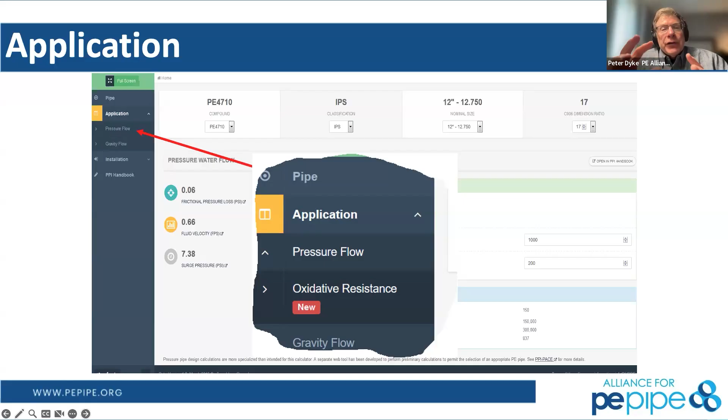So, Stephen, our competition likes to talk about polyethylene failing in the presence of chlorine. We did have an issue in some utilities 20 years ago. Could you give us the story of what happened, why it happened, and what the industry did to solve that issue? Absolutely, yeah, I was involved in all that, Peter. I've been doing this for a long time.

So back when there were a few instances where polyethylene over time did end up failing, it was determined that it failed because of oxidative degradation, which embrittles the material and causes small cracks to occur. When you go back and investigate, we found it happened for two main reasons: first, you had a very aggressive water situation, and you had high annual operating temperatures, such as in the desert in Arizona, Las Vegas, things like that, with more shallow burial situations.

And you had materials that weren't designed specifically for resistance to chlorine disinfectants. So what we did is we took about a 5-year research study and developed models that would forecast that. Then we developed test methods and new additive packages which could resist those types of failures. So now we have this additional testing requirement on polyethylene materials to specifically resist against those types of conditions, even in the worst case scenarios.

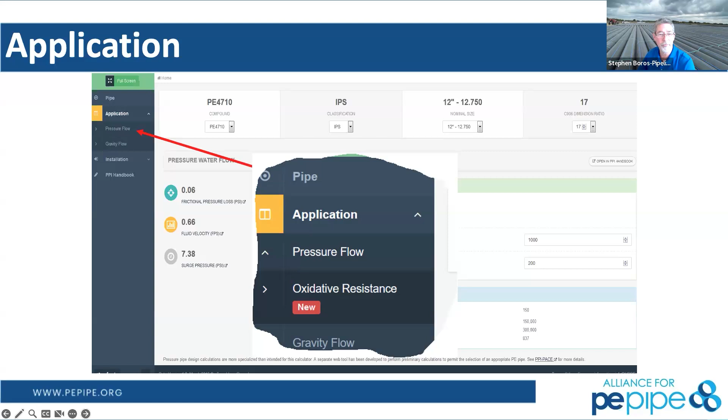The only one it doesn't apply to is the use of chlorine dioxide. So if you have a municipal system operating with chlorine dioxide, you can't apply this oxidative resistance calculator, but just contact your manufacturer to check on their recommendations. There are ways you can do that as well.

Thank you. So let's go back to our pressure flow calculation real quick. Very simple scenario: 8-inch pipe, I have a mile of it. Here's my operating pressure, 80 to 100 PSI. I need 750 gallons per minute through there. All right, what kind of pressure drop and flow velocities am I likely to see?

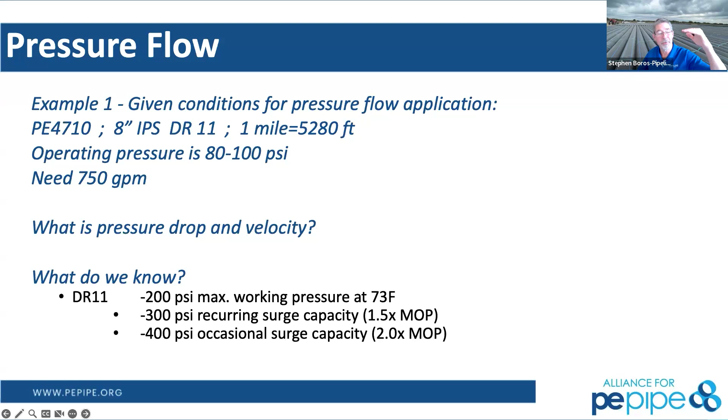Well, first of all, you know right away that a DR11 can handle 200 psi maximum operating pressure. And that means 300 psi means 200 plus another 100 psi recurring surge capacity, and up to 400 psi on occasional surge capacity.

So when you go in and solve that, you can solve for it in different ways. Do I want frictional pressure loss? Do I want to calculate what length of pipe I need to get a certain pressure loss, or my overall flow rate? For this situation, we want to look at what's my frictional loss.

So over a mile of pipe, 8-inch DR11, you look over on the left-hand side as your results. So my frictional pressure loss over that mile is 37 psi. You're going, wow, that's really high. But you also look at, this is a mile, and you're operating at over 6 foot per second flow velocity.

So you've got a fluid that's moving pretty quick through there. But the nice part of this is polyethylene can handle that. Even an instantaneous surge pressure would only be 90 psi. If you're operating at 100 and you have a 90 psi surge at that 6.3 feet per second flow velocity, water hammer effect, you're only going to have 190 or maybe 200 psi surge. That's well below even the pressure rating of the product, which in this case can go up to 400 psi. So even under those conditions, you're going to be just fine.

So you can look at different situations like that to see what works. Is it going to be a valid design for what I need?

You know, Stephen, that's one of the more interesting things about polyethylene. I keep trying to identify ways our product is different from legacy materials. And in this, the way we accommodate surge is completely different, both in our ability to handle it above our pressure class—we don't reduce—but also the way we attenuate that surge from the material property standpoint.

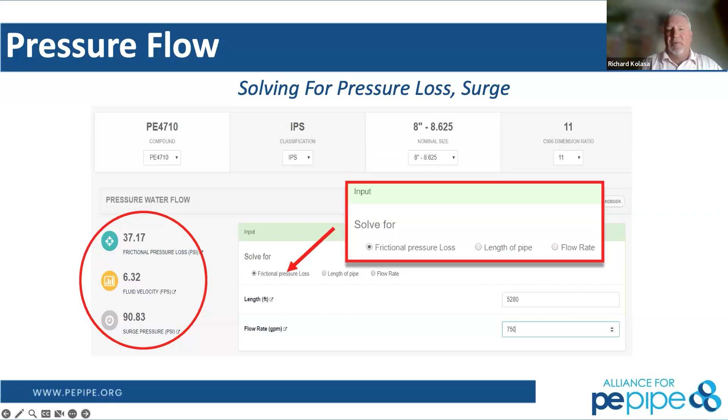You can't overemphasize that. I know it's kind of a bragging situation, but it's reality. We've got pipelines in the ground for over 25 years that have operated without any failure. So these calculators just help you get there, to help you understand what these materials can do.